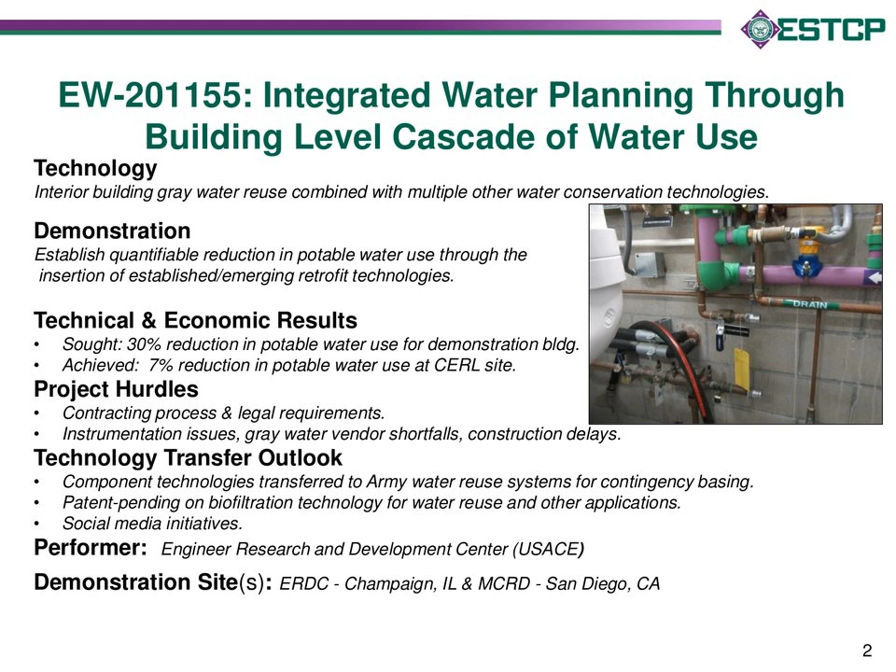Okay, next slide please. So our entire project team, it was a purple project, a DoD project.

We have a Navy partner, Gary Anguano, who's online, and he accompanied us on some site visits. We also had an Air Force partner involved in this. And then we had our 2 sites. Initially we started out with Fort Irwin, California as one of our demonstration sites, but what happened there was we had a change of command and they were no longer interested in hosting.

So we ended up demonstrating at our local site, which is the CERL site, where you see the University of Illinois listed - we happen to be tenants of the University of Illinois here at CERL, and so we worked with them. They are the owners and operators of the building. Our second site was out at the Marine Corps Recruit Depot in San Diego, and Richard Hatcher was instrumental in providing data and support for our many trips out there. On the right, I wanted to acknowledge all of the other people that contributed to the project. They didn't start out at the beginning, but they provided a lot of support, stepping in where we needed it as the project went on.

Next slide please. Background - technology description.

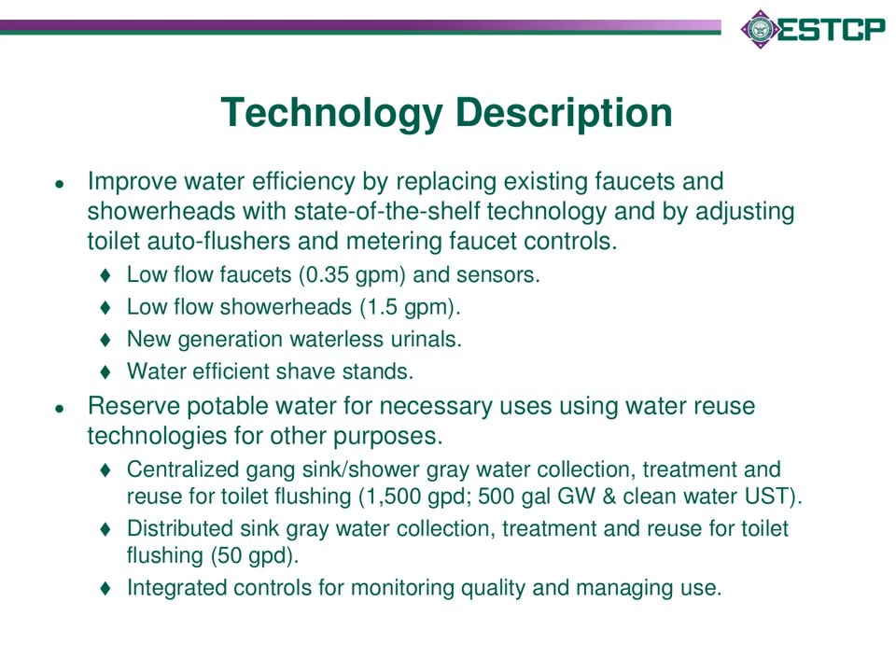So this is an overview of the technologies that we included in the project. It shows the plumbing retrofit technologies that we used, and it also lists the gray water technologies. There were 2 types of gray water technologies we were interested in. One was building scale, a large scale, targeted towards a gang shower, gang latrine that we see in a lot of our training barracks. The second level of gray water was what we call tap to toilet, which is collecting sink water and using it to flush toilets locally within a room within a building.

Okay, next slide please.

So our technical objectives, again, were to retrofit existing buildings. Part of the large expense of reusing gray water is when gray water is taken from a sewage treatment plant and has to be shipped long distances through purple pipe, the infrastructure is quite expensive. So the idea was to do this locally within a building.

But first, to reduce the water use through high efficiency fixtures, and again, to address the two scales of gray water. We have basically the process here to compare the performance of the buildings pre and post retrofit. And as we describe both of the demonstration sites, we'll tell you how they differed in the pre and post assessment.

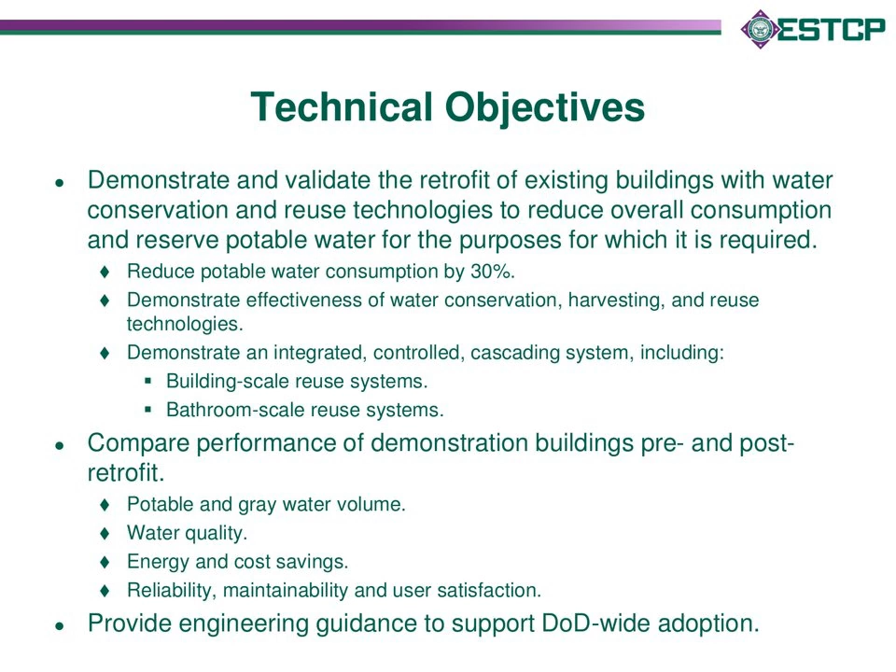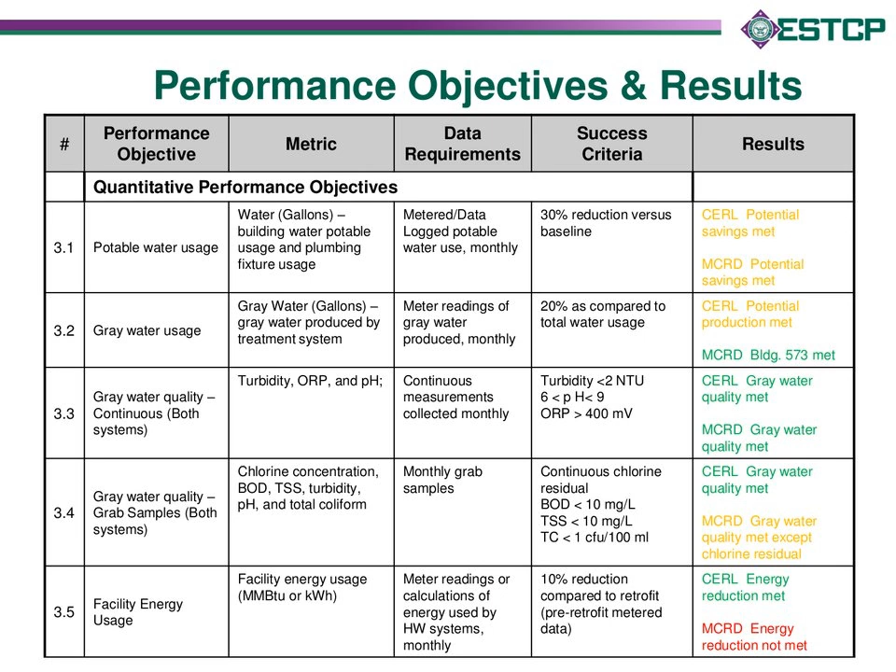So the next set of 3 slides is the detailed listing of the performance objectives and results, and we're going to go into this in more detail later in the presentation. We're just going to ask you to go through this quickly, the next 3 slides.

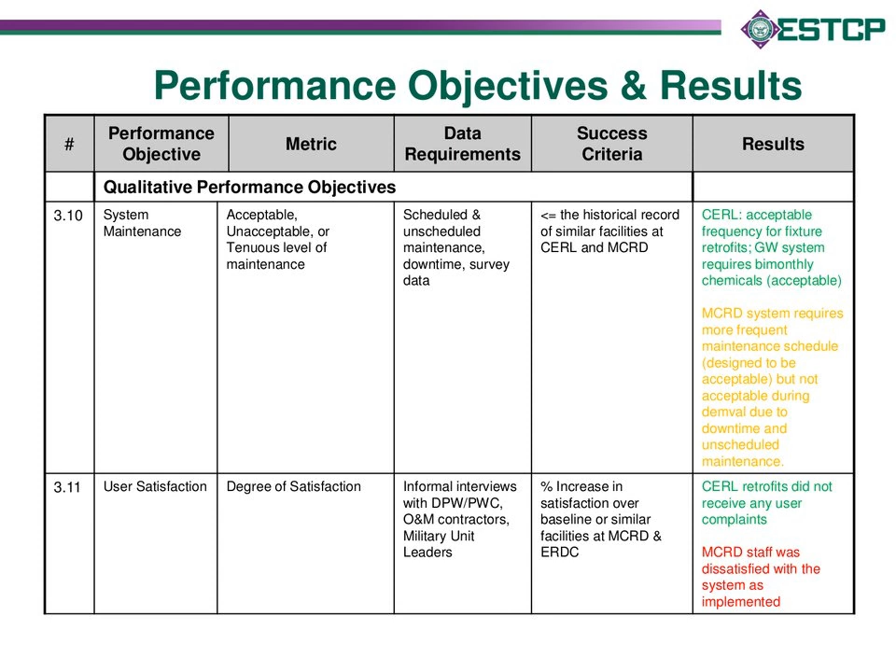Okay, so on then to slide 9, describing our technical approach. Our goal was to reduce overall building water use, building potable water use, that is, by 30% within the building, based on the technologies that we are incorporating in 2 different water regions.

And right here we see the photos of the 2 regions. We have the very arid, dry southwest region, and then we have the not so arid and dry Midwest region. And so there are different drivers for water conservation in both of these regions.

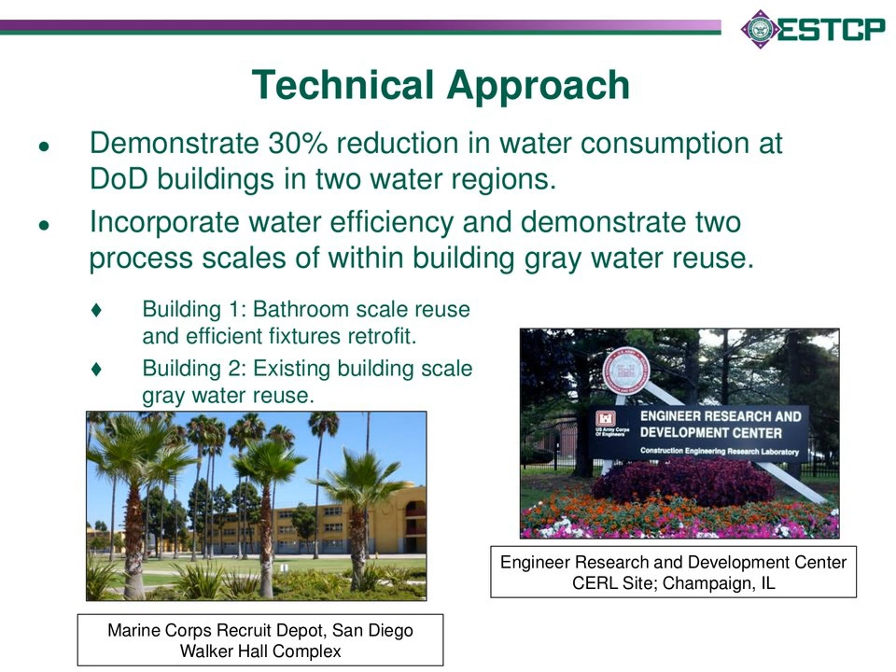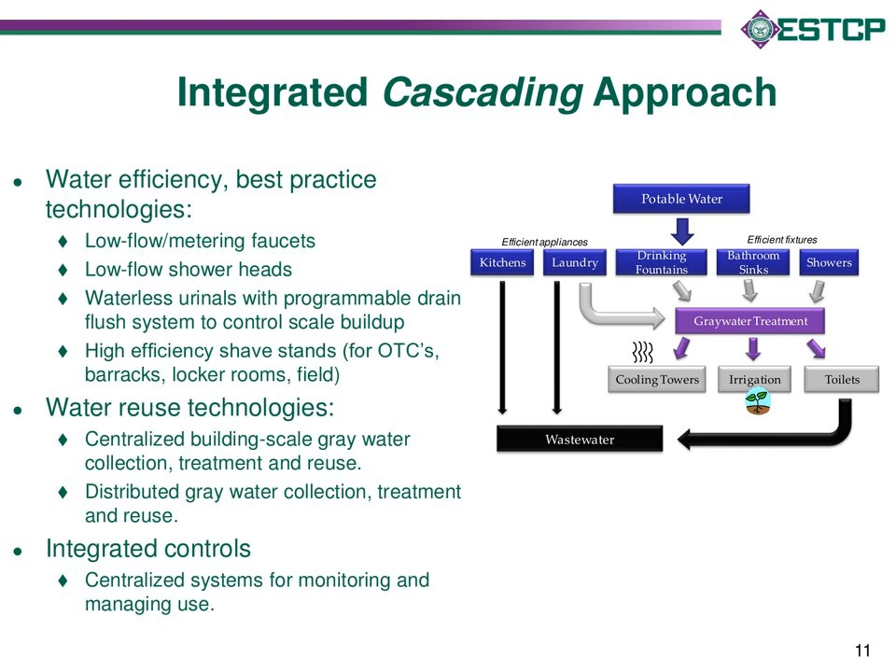And our approach was what we call the cascading approach, and that is using the appropriate source of water for the need, for the end use. Whereas potable water is needed for uses that make contact with humans, and non-potable water is perfectly appropriate for uses such as flushing toilets or flushing urinals. And we also included some control technologies within our demonstrations.

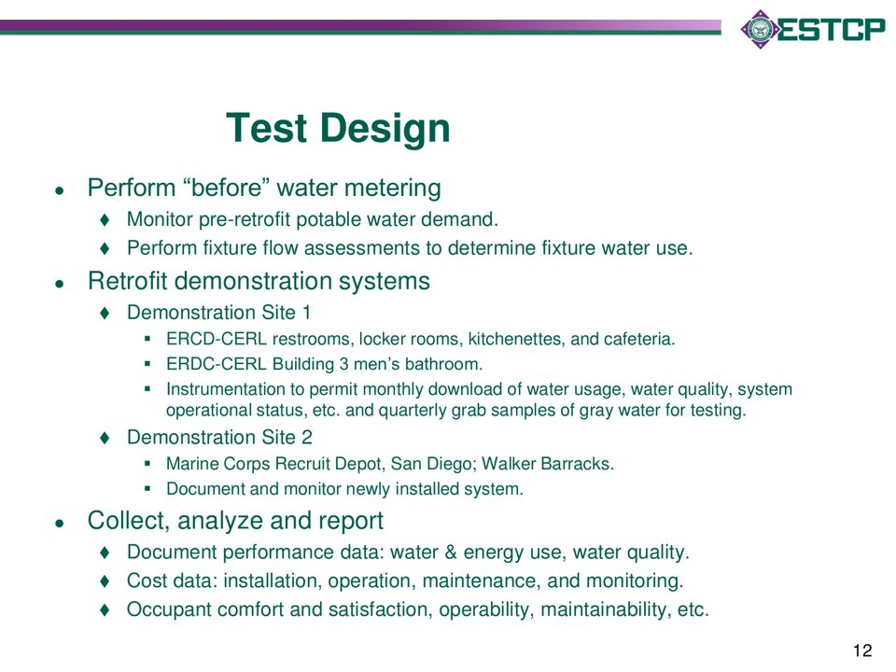So we're on to demonstration site 1. This was our local facility that we work in here at CERL. We isolated this project to the main complex of 3 large buildings to the left of the photo, building 1, 2, and 3. This is where most of the offices are contained and also where some lab facilities are contained.

So we addressed the small-scale, under-sink gray water reuse in these facilities, and we also incorporated the plumbing retrofits here. We included monitoring both site-wide, monitoring building level water use, and then we did some auditing of the fixtures so we could monitor fixture level use. We also monitored the bathroom that contained the under-sink gray water reuse system.

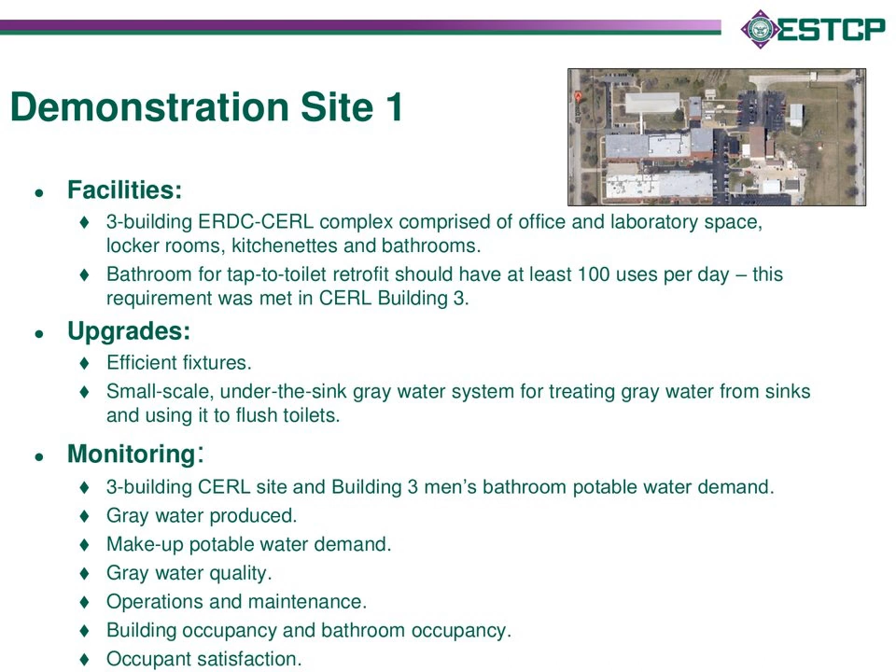So our first technology that was implemented at the CERL site were simply water-efficient fixtures. And we did some auditing, the kind you've seen with the plastic bags and the stopwatch, timing and looking at flows and identifying leaks and conditions. We also identified some other problems like sensor operation on the toilets. We were not replacing toilets as part of this project, but we did get involved in adjusting the sensors and learning how those worked.

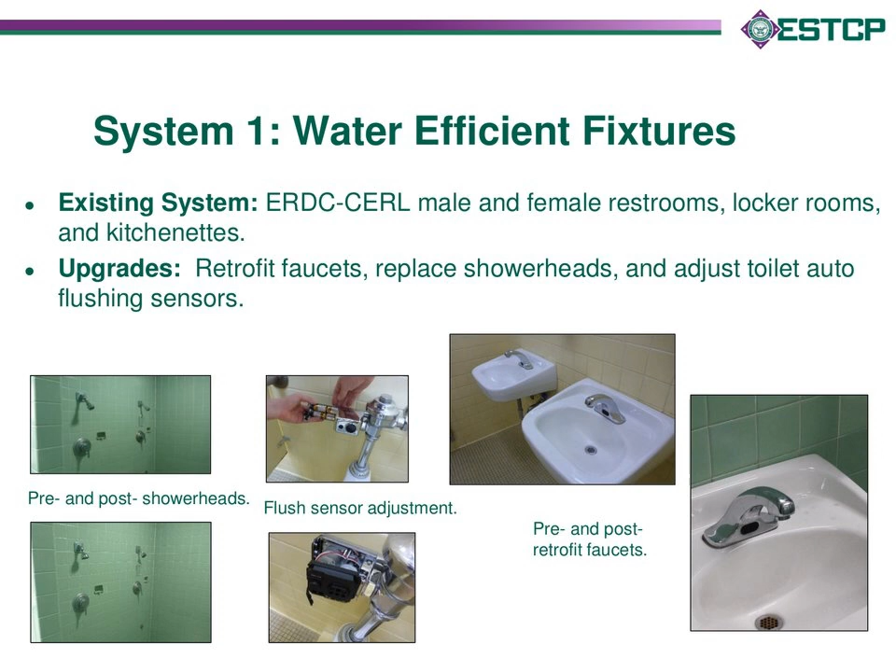So next we should be on slide 14, which is the distributed reuse. I'm going to turn it over to Dr. Page. So we were really excited to try and incorporate a pretty new concept and technology into this demonstration study. That put us on the bleeding edge a little bit, and we'll get into the details as to how this went. But the general concept that we approached the project with was to take a system, at least a concept or framework, that's been marketed and deployed in some cases for residential settings.

Where water is taken, treated directly from the sinks or the sink drains, and then used locally in the same bathroom to flush. So this is kind of an alternative to a building scale centralized system.

It's a very small scale, but the idea was that if we took this approach, we might be able to come up with something that might have lower retrofit costs, and that you don't have to get the whole building plumbing to implement the system. It's something that can be rolled out one bathroom at a time, starting with some of your heavier bathrooms or heavier water use intensity bathrooms. Another idea with this was that we could take these technologies and hopefully kind of target them to high visibility and high water use bathroom areas.

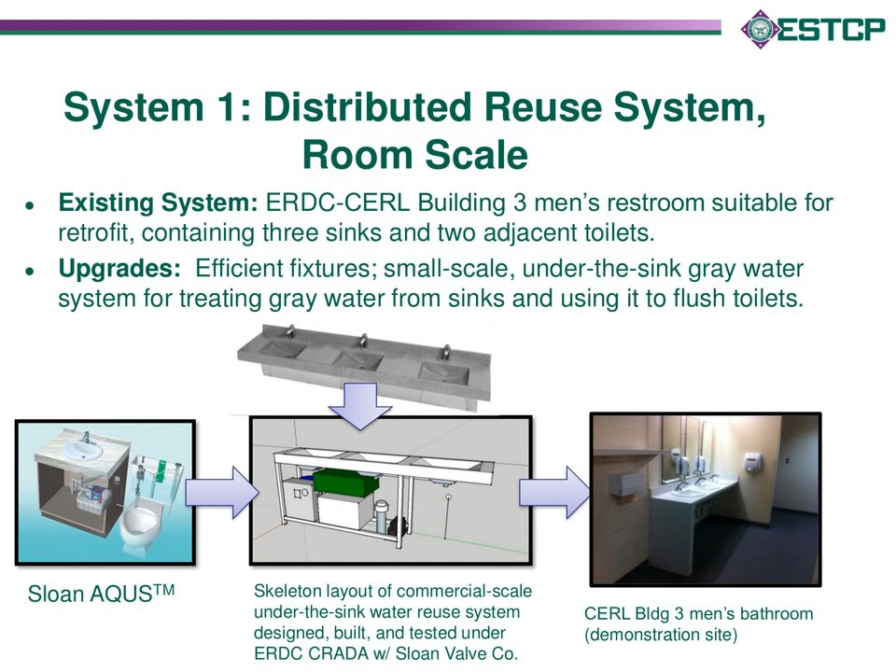This summarizes some of the preliminary work that fed into this demonstration project. At the outset, we worked with Sloan Valve Company to develop some prototypes. We tested two different prototypes, one built by them, one built by us, doing head-to-head testing at the laboratory scale under a CRADA with them, which was leverage funding for this program. Based on that, we down-selected and came up with a final design for the under-sink system to be demonstrated in this study.

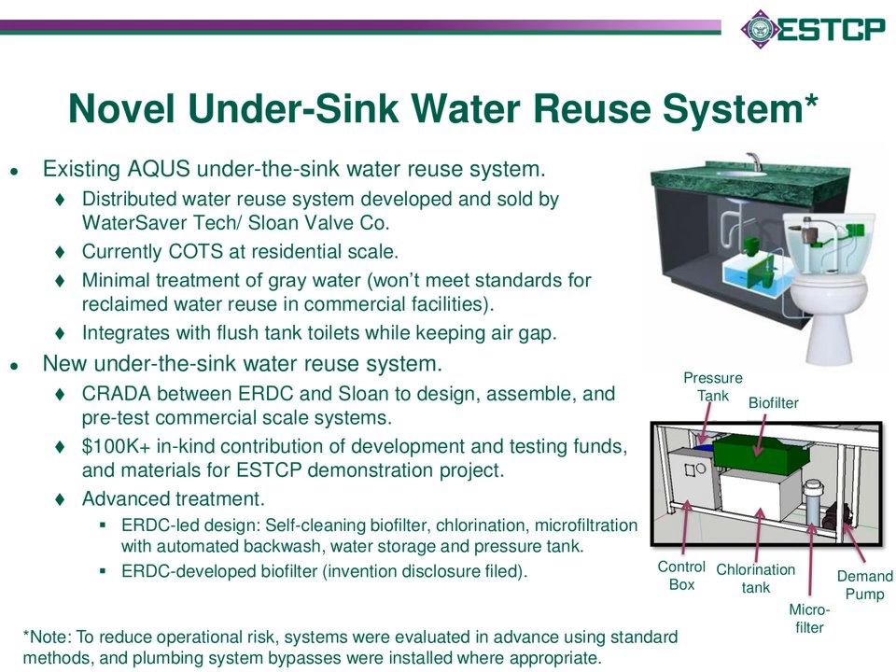We had an upflow biological activated carbon system, and our work in this space led to proprietary developments for gray water treatment specifically. We designed the system to minimize overall complexity while still meeting water quality requirements for commercial settings. One big jump from a residential to a commercial model was having to account for the regulatory requirements in a commercial or publicly used bathroom for gray water reuse, which were quite a bit different and required a lot more treatment, which was a challenge to automate and implement.

In this program we planned two phases of testing: one an offline test within the bathroom with no water reuse demonstrated, but still treating the sink water coming into the system. We originally planned that for a 3-month period and ended up extending it to 5 months. Throughout the tests we observed some needs for improvement and didn't feel comfortable fully integrating this with the sinks and toilets, so we only integrated with the sinks. But we collected a lot of really good data that will help shape a path forward for this system.

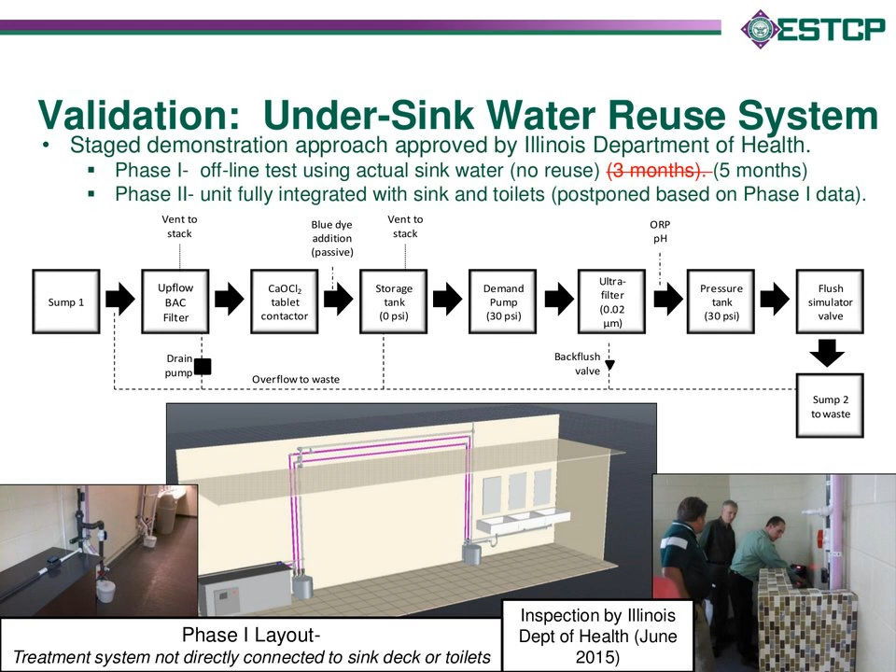Our second demonstration site—I mentioned earlier we had some contracting obstacles. Initially we had planned to install a building-scale gray water reuse system at Fort Irwin. When contracting difficulties made that very challenging, if not impossible, we identified a site that already had building-scale gray water reuse systems in place, and we were allowed to document those instead to fulfill this part of the project.

So what you see here are some interiors of the facility at MCRD San Diego, the Walker Hall complex. This was constructed as an MCA construction project, opened in 2012, designed for LEED Gold, and indeed one of the buildings met Gold and two of the buildings met the Platinum standard. It also had solar panels, but the gray water reuse was an extra add-on that the users wanted. We had three buildings in the complex.

The Smart Clinic, which provides rehab for Marines injured during basic training, the medical barracks where they stay while injured, and a non-medical barracks. These have gang latrines, which lend themselves to a centralized gray water reuse system within a building.

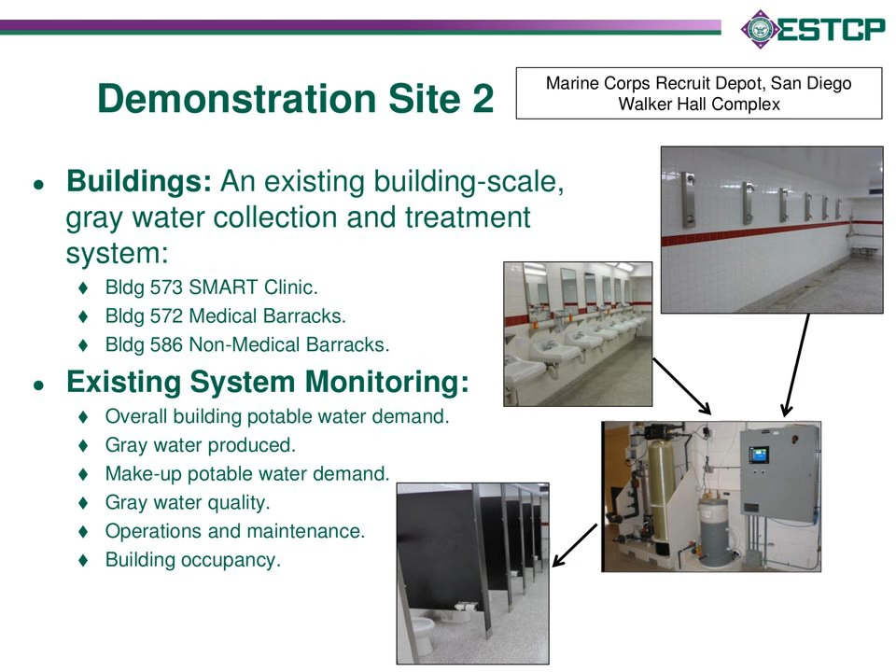You want to talk about this one?

They had two below-ground storage tanks, one for the influent gray water collected from showers or sinks, and they had onboard metering capabilities. We did some extra metering as well with external meters. These systems were installed new with the building, so this was a fairly optimal case in terms of looking at costs, since they were put in with the building itself. This was a really good system to study for this program.

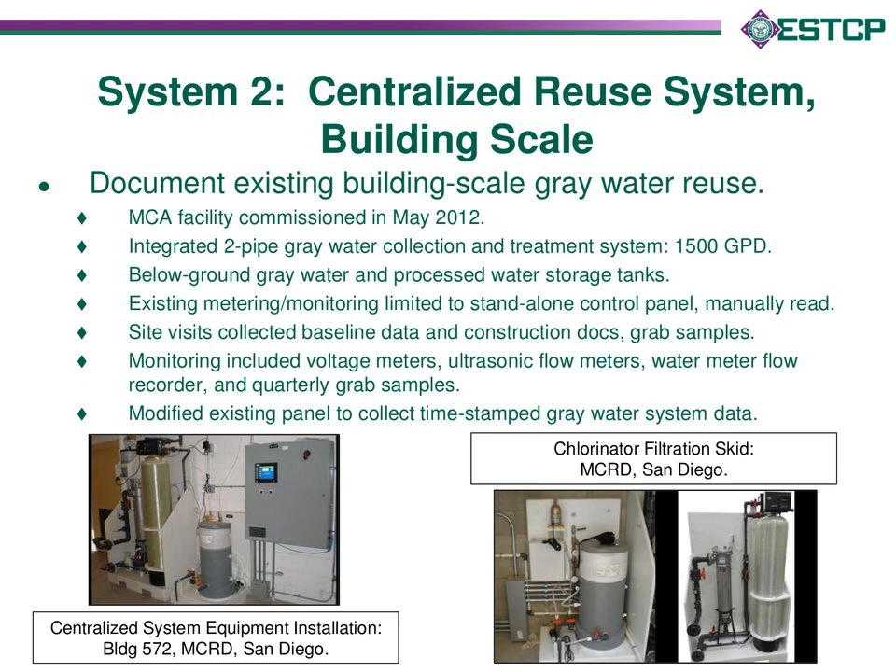For the data collection out at MCRD, or more generally, we were measuring the water-efficient plumbing, looking at the gray water collection and treatment systems for both systems, and also the monitoring and control. We had a series — let's go to the next slide — showing more of the type of equipment we were using to collect data for this project.

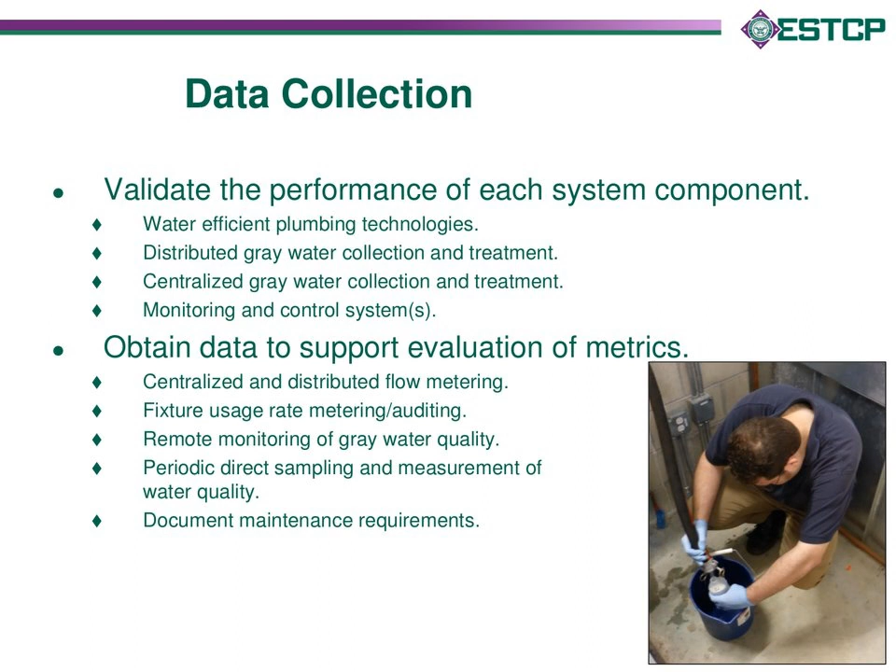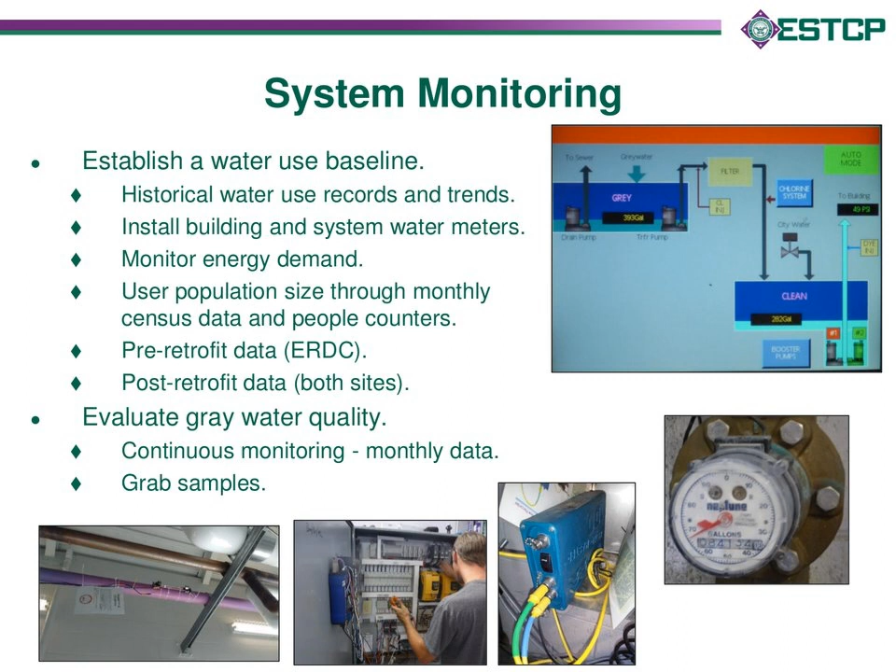Next to that, in the blue-encased box, is a water meter flow recorder. We started out collecting 5-second interval data of water flowing across the meter, which let us get more detailed in our analysis rather than having just one reading a month collected manually. Then, where you see the gentleman standing by the electrical panel, we installed voltage meters to see the electrical demand of the gray water system itself. The next photo on the far left is one of the meters feeding into the panel, which I believe measured produced gray water. We wanted to collect that data over time, not just once a month when local staff was able to collect it. So these are some of the methods we used to collect data.

Now on to the performance objectives — we have a series of slides for each of these objectives. We'll start with the potable water usage.

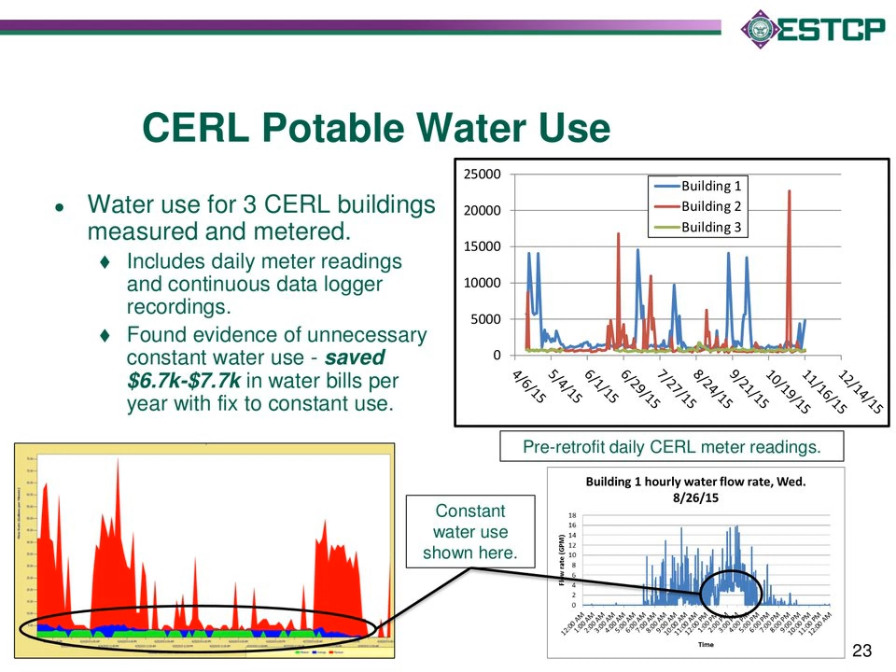One of the buildings has a hydraulic pump, so you see the spikes from that. Another building had a scanning electron microscope. What we thought was interesting, and is pointed out in the text, is we discovered through the data that the scanning electron microscope, which has once-through cooling, was running continuously — it wasn't being turned off because the cooling has to run for 15 minutes after a user is finished. We identified that as a side benefit of metering for the purpose of our project.

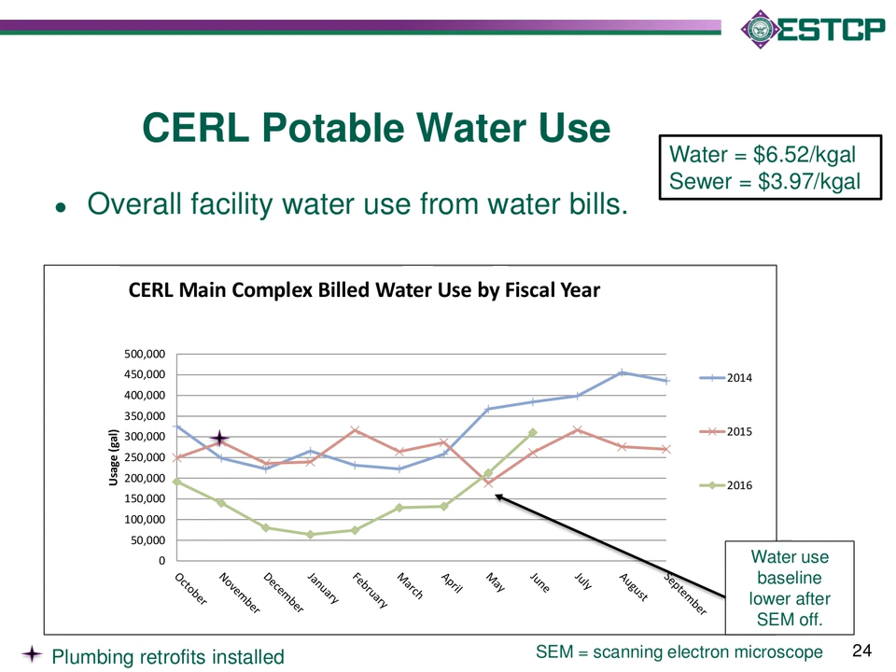And so I would like us to be able to claim credit for all this, but I don't think we really can.

I have some charts on this, but the way we determined our water efficiency savings was from the audit method. The meters we installed - this is the nature we found from a lot of the metering work we've been doing - is buildings that don't use a lot of water. We're primarily toilets, sinks and showers here where we have locker rooms, but we have very large 3- and 4-inch pipes supplying essentially a building with a couple of bathrooms, and the meters are just not that fine resolution. So we believe we were missing a bit of the water consumption through that meter because of the size of the pipe.

Some of the recommendations that came through were to reduce the pipe size and put a smaller meter in, but we weren't really sure that would be accurate if we wouldn't be creating an orifice there by dropping the size. But anyway, I just wanted to make the point there was significant reduction. We don't believe it was all due to the plumbing fixtures, and we did use a model to validate the plumbing fixture reduction.

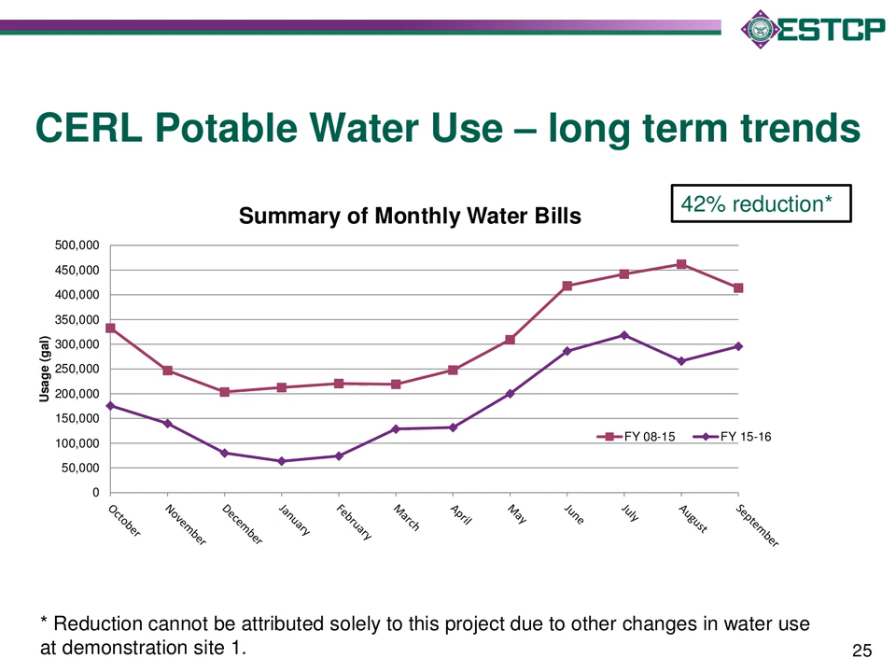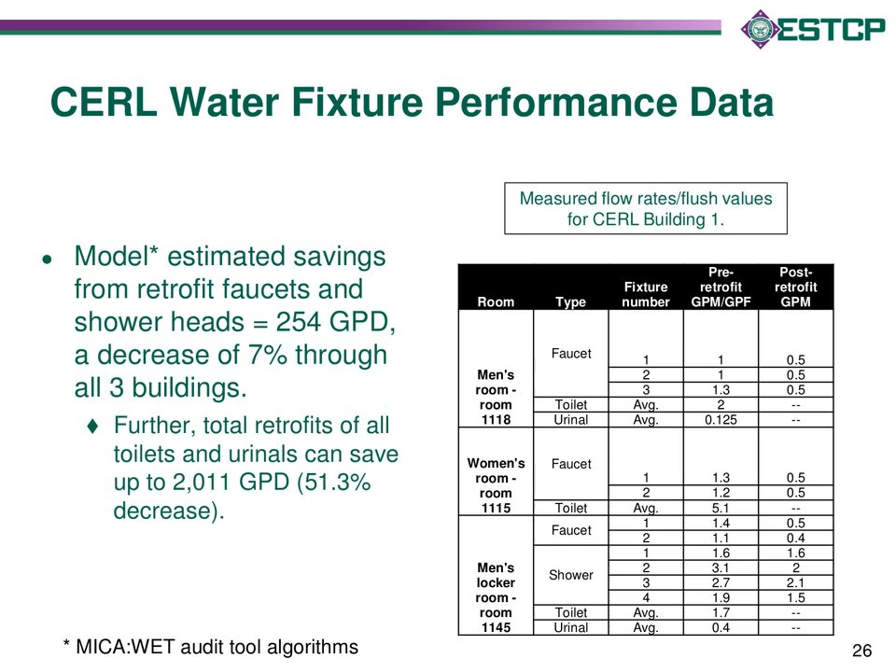So one other technology we were interested in looking at in the context of locker rooms - we've also been picking up chatter from people working in the field that there's a need out there for a more efficient faucet type that can also clean razors. So what happens in the field is that a lot of personnel will take aerators off of the faucet to increase the velocity of water or do various things, but it basically results in a really inefficient approach just to clean their razors.

So we worked with a company, really in a very small capacity, through this project to identify an alternative approach that could be useful in locker room settings, but also could be used in shave stands on the field or, say, in the containerized shower systems in the field as well.

We actually have training areas where we've seen a lot of this, like out at Fort Leonard Wood, where the sinks have been dismantled a little bit and the flow coming out is 2 to 3 gallons per minute, which not only is a waste of water, but also takes away from the water pressure in the showers, et cetera. So we were looking at a system that has a mechanical auto shut-off mechanism, so it doesn't require batteries. When we were doing market research on this, plumbers and other folks said that battery maintenance on the IR systems can be a bit of a pain.

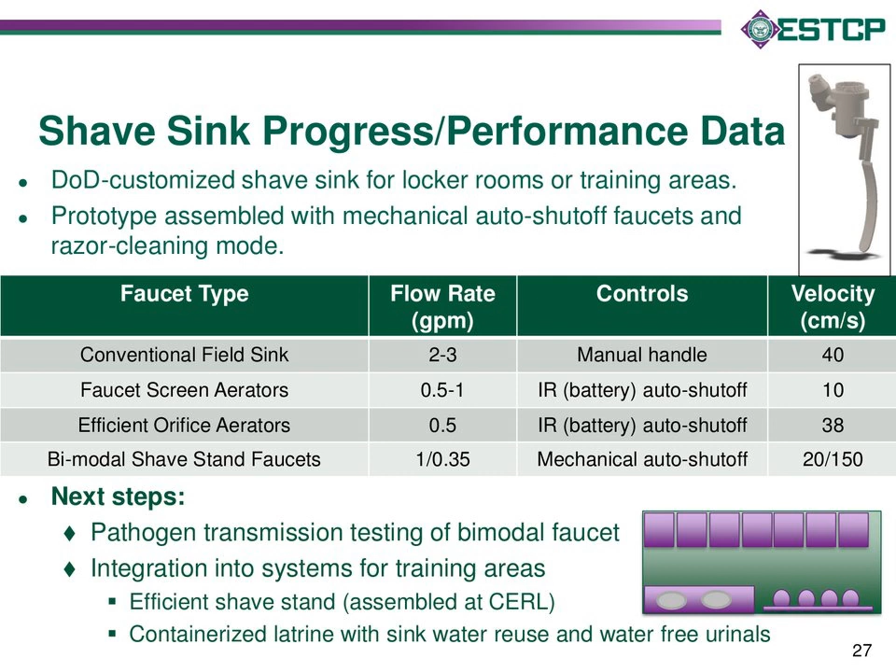And then we had the company build us some custom prototypes, which we did some further work on to improve their functionality and get enough data to do some testing. So we think there's promise here. We didn't install it in a building, but we did some testing out on our experimental forward operating base here at CERL in Champaign, with the end goal of this moving out to CBITEC after we do some more testing.

So the reason we documented the potable water for the other two buildings as well is to look at the theoretical possibility: if these gray water systems were operational, what would the cost benefit and payback be? Clearly the medical clinic uses the least amount of water — it's some therapeutic uses, soaking tubs and saunas and a therapeutic pool and a couple bathrooms — but the barracks themselves have very large shower rooms and toilets and urinals.

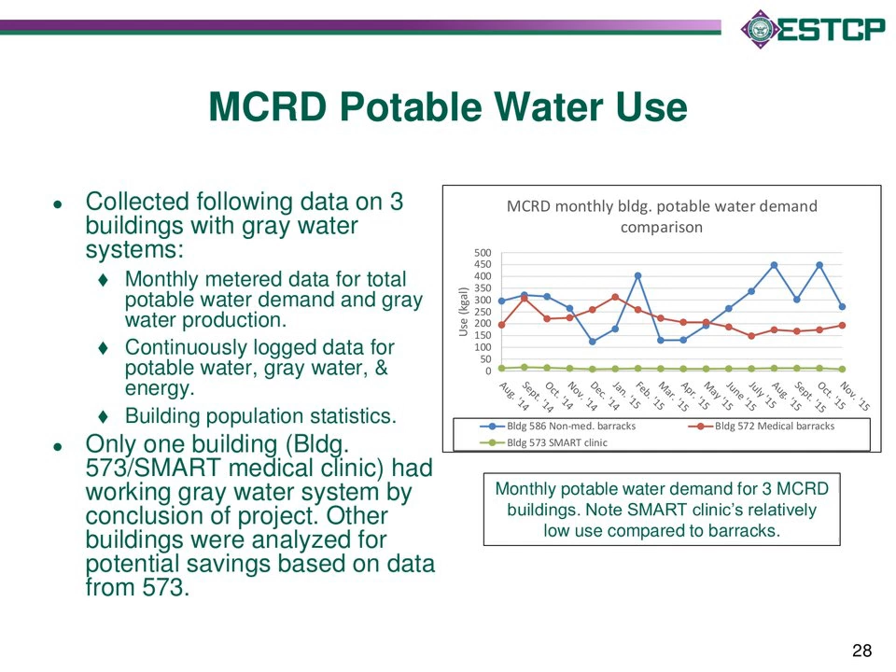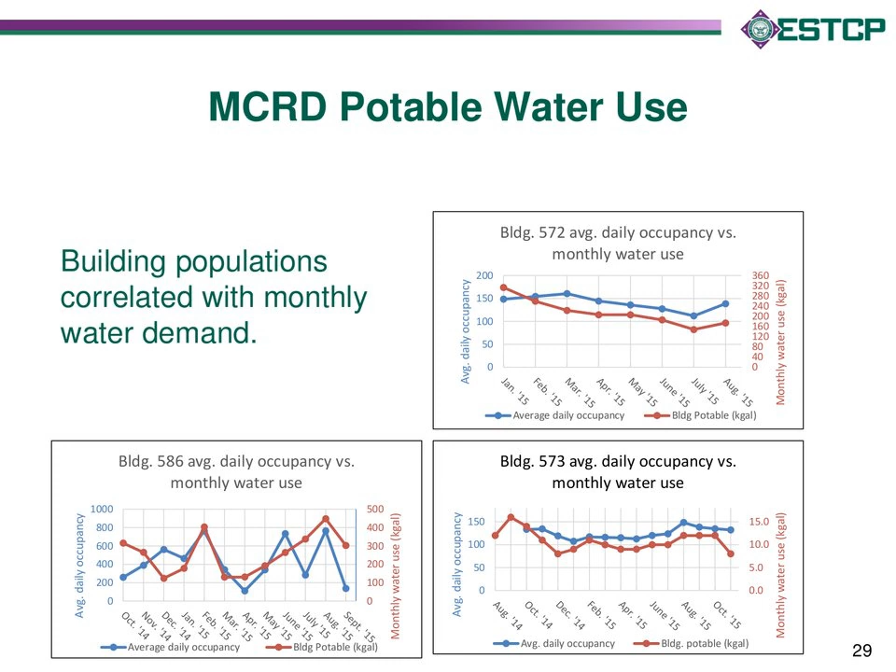So now we're on the gray water data for CERL. For the CERL retrofit, it took place in the Building 3 men's bathroom. We were interested in looking at water use on a per capita basis, both in terms of how much water would be generated from hand washing and how much would be required from toilets. So we had a couple different counters on the doors.

This is as good a time as any to talk about education of the building occupants, because it might be a little daunting to open the bathroom door and see this electronic light flashing at you. We had signs posted outside and inside the door about the people counters explaining what it was for, in addition to signs inside talking about the gray water system, even before it went in, informing occupants that this was coming and who they could contact with questions.

We looked at a number of ways of counting people on installations, and this is a really important topic because we've dealt with this in other locations as well. It's very difficult to get real numbers, and on a military installation you have other factors to deal with: people visiting for training, retirees visiting because they want to go to the PX, family members — do they live on post or off post? So counting people is no minor detail, and a lot of water use, even though we measure it in gallons per square foot, is really driven by people, so it's important to figure out good and accurate ways to count people.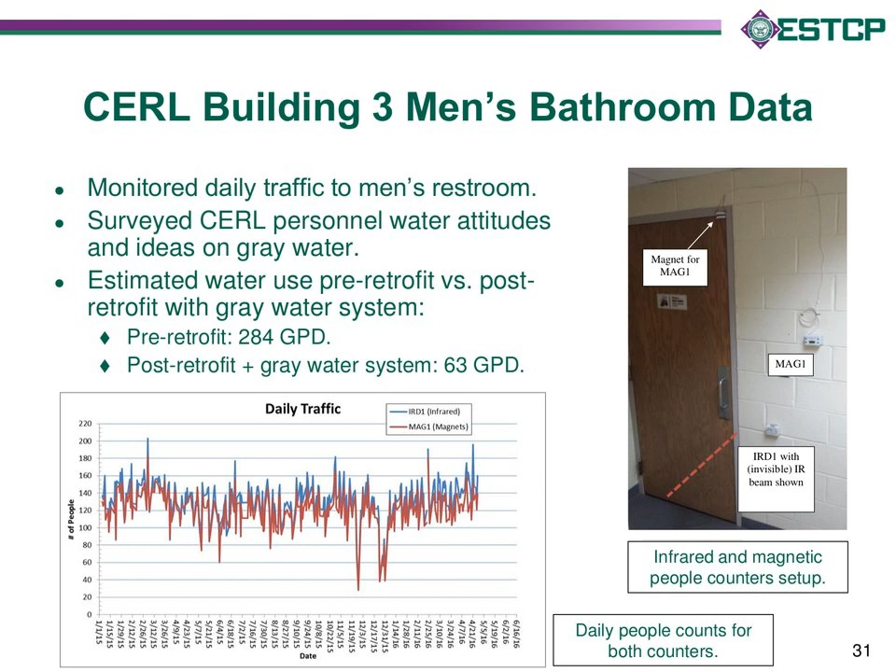So we did collect water data for the gray water system, both from our meters installed out there as well as some of the onboard metering feeding into the control panel. As Elizabeth mentioned, we didn't have baseline data for this site. The systems were all installed in fairly sustainable design buildings. But with water reuse, one of the nice things is you can look at how much water you're reusing, and that gives you a sense of how much you're offsetting your potable demand. So that was the basis we used for analyzing the data.

As Elizabeth mentioned before, there were some issues with meters not fully capturing all of the instantaneous water demand at this site. So we had to use the modeling and look at the data very carefully, and also install some of our own meters to validate some of the data there.

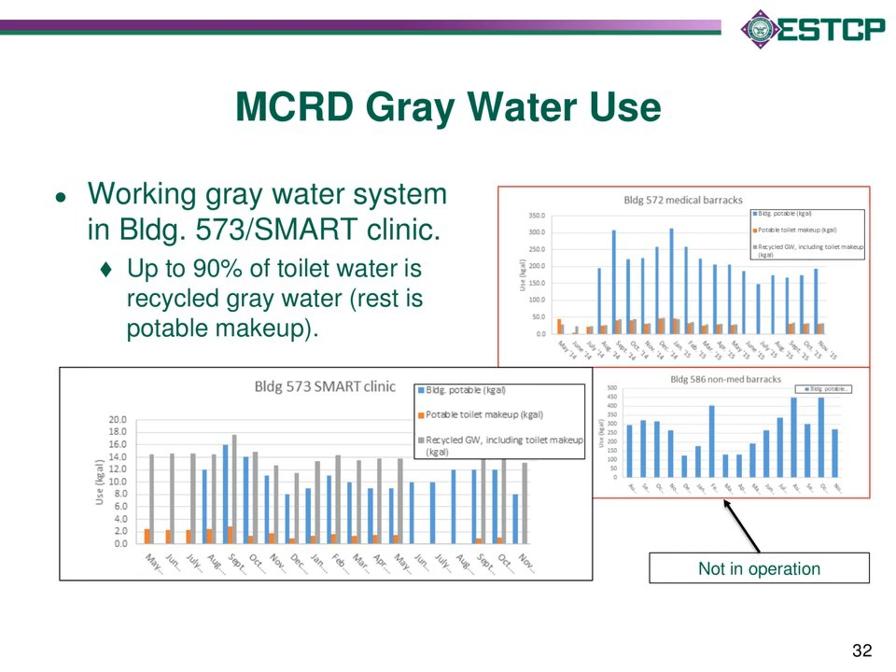So now we'll transition to results for gray water quality.

I'll start going way back to when we were working on the CRADA work with the systems developed in coordination with Sloan Valve Company, where we did pre-testing and pre-validation of these systems under controlled conditions. There's a model we used for pre-validation of gray water systems from the industry that came about early into this project. I think the final version was adopted in 2012, and that's the NSF 350, which is still referenced and used in a lot of guidance documents.

The targets for that are to get your biochemical oxygen demand, or BOD, down less than 10 mg per liter, get your turbidity down low, make sure there's no bacteria in the water, and maintain some chlorine residual. These are standards that apply to commercial or public type settings, which weren't part of the equation for the residential systems, which were more based on having some chlorine in the effluent and not jamming up the valves in your toilet too badly.

So the amount of design we had to put in was quite a bit higher than what was used in the residential model.

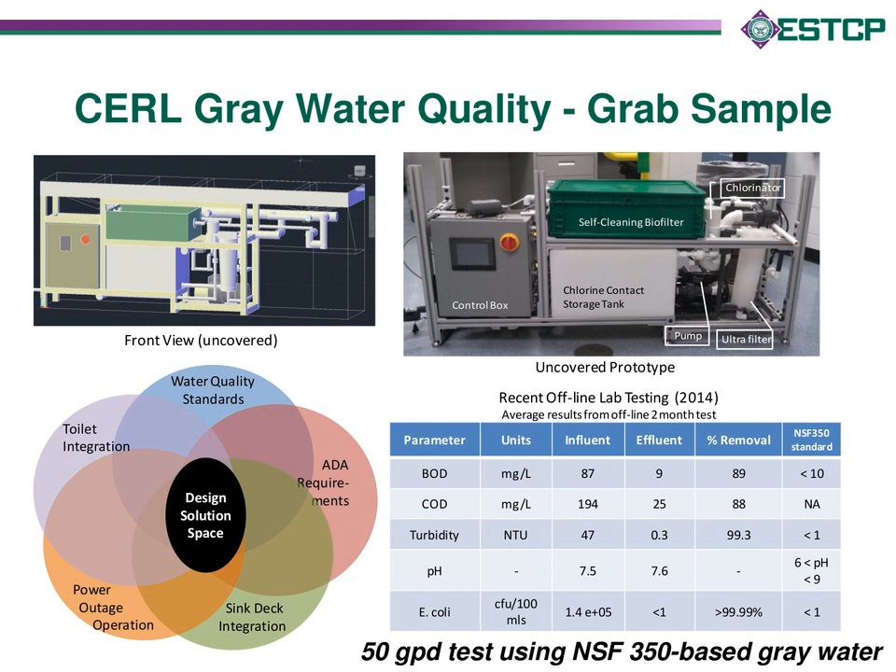So the pre-validation we did, this is data from a 2-month test, and the system seemed to be performing quite well. We did some intermittent loading, but it was relatively continuous compared to what you might see in an actual bathroom where your sinks are firing on and off.

For the phase 1 demonstration, again, this is with the system installed in the bathroom but not hooked up to the toilets to flush those. We were still sending everything to waste at this point, just to collect data under realistic conditions.

We were able to keep the system basically running autonomously for about 5 months. We sampled it very frequently. Andy Herr here helped with a lot of the water quality analysis and sampling, and did a lot of work to really characterize the long-term performance of these systems.

Overall, the automation of the system was pretty good, and that's an absolute requirement for this type of setting where you're not going to have an operator that wants to troubleshoot anything.

We did have some design issues that we're still working on for the next generation of the system. We tested this for 5 months, then pulled it out of the bathroom afterwards. But we did have some issues with some of the internal controls—some of the pump level and demand pump pressure switches were keeping our pumps on longer than planned, which was costing us in energy.

And then chlorine contact and getting the chlorine dose right over that extended period of time under that variable load was also a challenge. One challenge we've seen with these types of systems, both this one and the gray water system at the building scale, is that you've got to have a residual chlorine in your effluent, in the form of free chlorine.

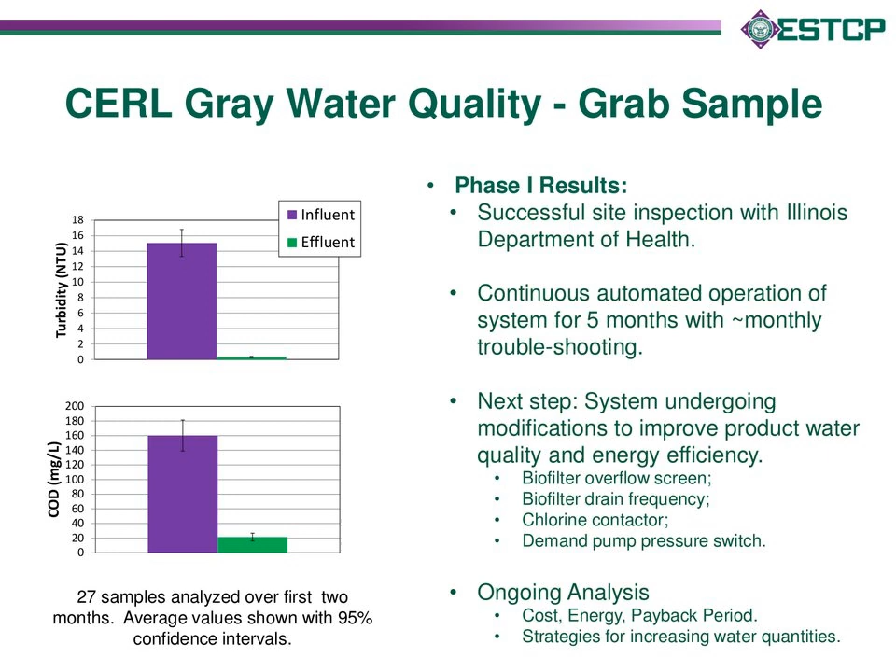So overall, the system works fairly well with regard to water quality. See comparisons of influent and effluent values. For the most part, we did see some minor spikes here and there, sometimes during operational downtimes for the building, like winter holidays. We particularly saw some issues with our biofilter performance, but overall it was working well.

Good question - somebody asked where the ammonia came from. On our site here, there's actually combined chlorine coming into the building. There's some ammonia residual in the hand washing water, and chlorine typically reacts with dirt, but that's one potential source. In the bathroom and shower system, which I'll get into in subsequent slides, ammonia can come from washing and proteins coming off people, but also urination in the showers is always an issue. We see that a lot in the field, more so than here, where in these systems, at least the shower systems we looked at, ammonia was probably less due to urination because there were basically toilets in the same bathrooms.

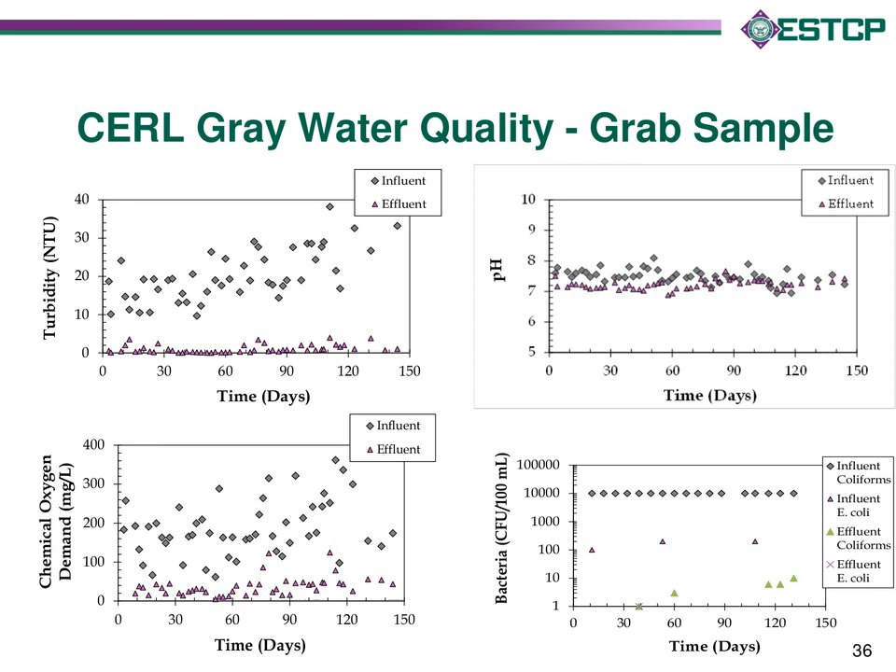But in the field, because the bathrooms and showers are split into separate containers, we see a lot more urination. I'm happy to answer that question anytime - good question.

Okay, so this is some representative data collected from the influent tank and the effluent tank, and we also sampled the toilets themselves to look at the point of use, to see if water quality changed during distribution within the building. Just comparing the influents and effluents, the system appeared to be meeting requirements for water use for toilet flushing in the field.

We did see some issues again with the chlorine residuals - even in the sinks in the buildings, they were sometimes difficult to measure. Because the bacterial counts all looked good in the effluent samples, it seemed like the chlorine was doing what it's supposed to, but maintaining the residual wasn't always helpful. Again, the ammonia issue could be contributing to that through the breakpoint chemistry process. Let's go to the next slide here.

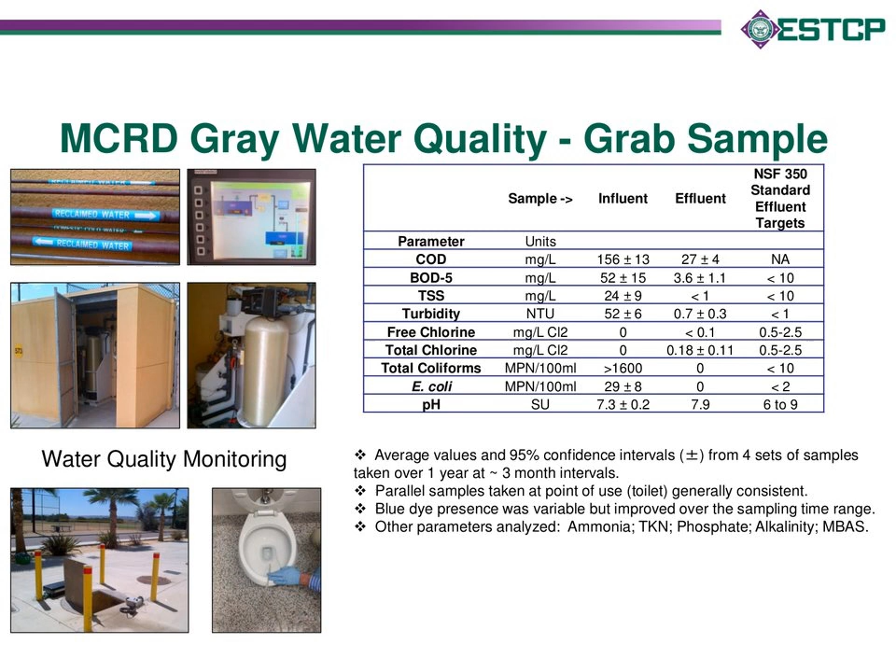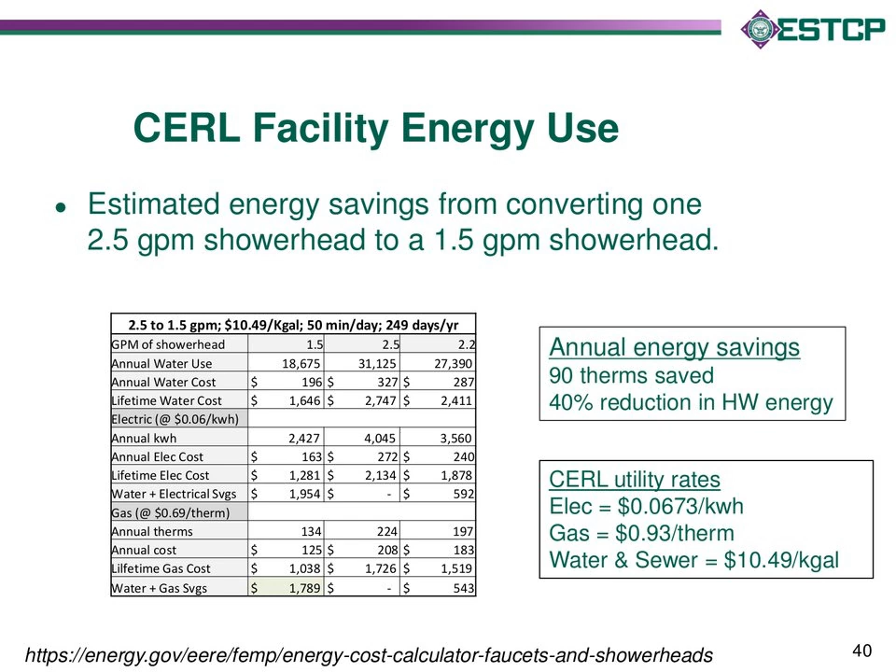We're supposed to give this as a percentage of our water use, or energy use here - about 1% of our site's natural gas use would be saved by these water fixture retrofits here at CERL.

We're looking at these numbers in a little more detail to see what might be driving that energy cost so high. Just as a reference point, when we design systems for field operations where fuel is very important, we target energy consumption less than 20 watt hours per gallon. So the values we were observing are a little bit high, especially for a relatively simple treatment process.

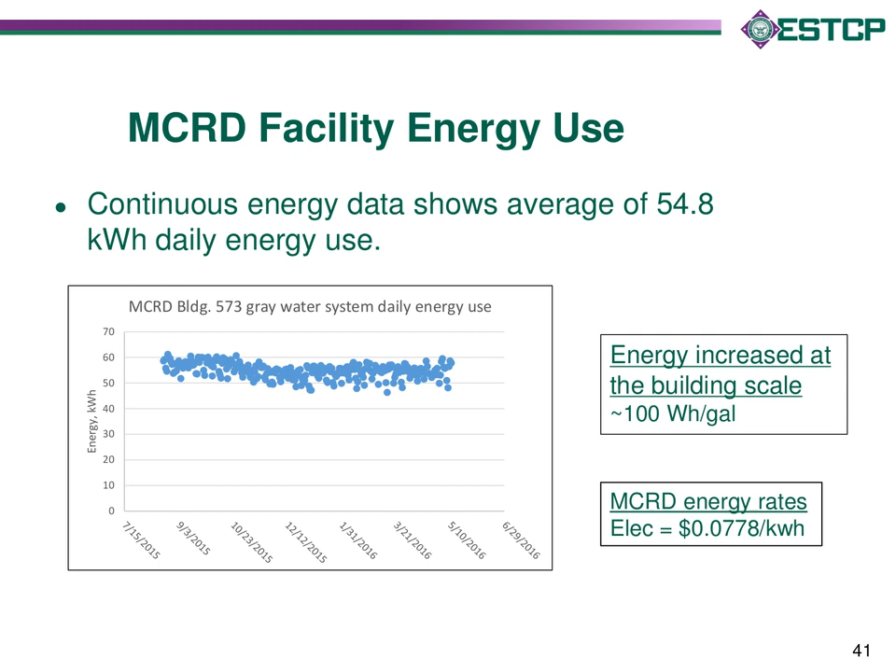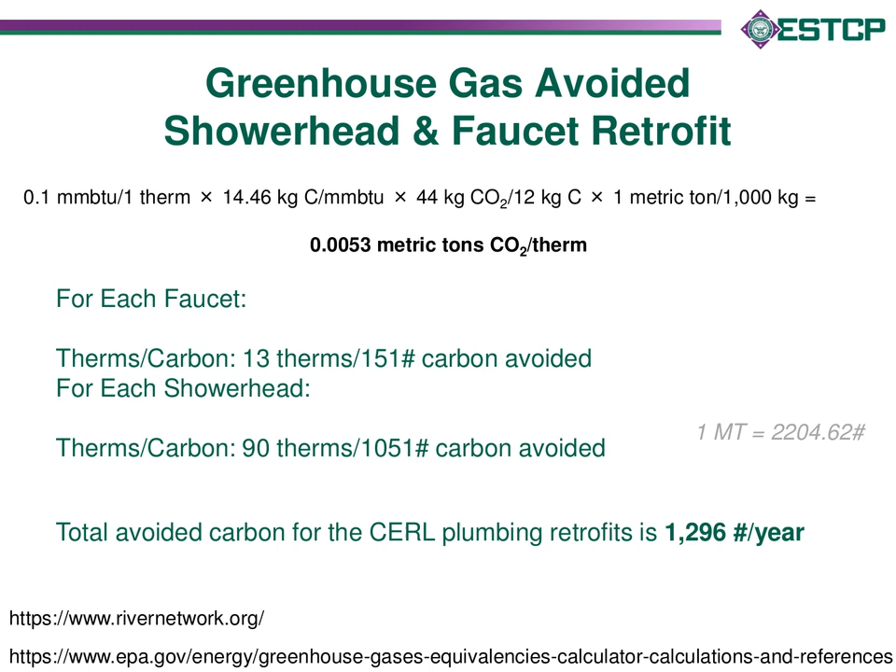Our next performance objective was system integration. The only issue we identified related to system integration had to do with the Building 3 under-sink gray water reuse system. Martin mentioned that if we reduce the flow in the faucets, we produce less gray water that can be treated and used to flush toilets. So in fact, in the Building 3 men's restroom, we did not retrofit the faucet aerators because we needed that water to supply the gray water treatment system. But that was the only issue we observed in this objective.

The next objective is life cycle cost. Starting with the fixtures, particularly when they are saving hot water, they tend to be very cost effective and pay for themselves very quickly. What I did here is three values for CERL. We typically include the sewage cost in with the water cost when looking at life cycle cost savings for plumbing fixture retrofits, but we also include hot water heating if it's an appliance using hot water. So we came up with quite a quick payback when we looked at water and energy costs. We have quite high water costs in this area, but the energy really made this technology pay for itself very quickly.

We also identified additional retrofits that could take place, shown here with the toilets. We had some toilets that used an awful lot of water, some 5 gallon per flush, but it's cold water. So the payback period is really not as quick as it is for the hot water consuming appliances, although we do recommend that the institution pursue those.

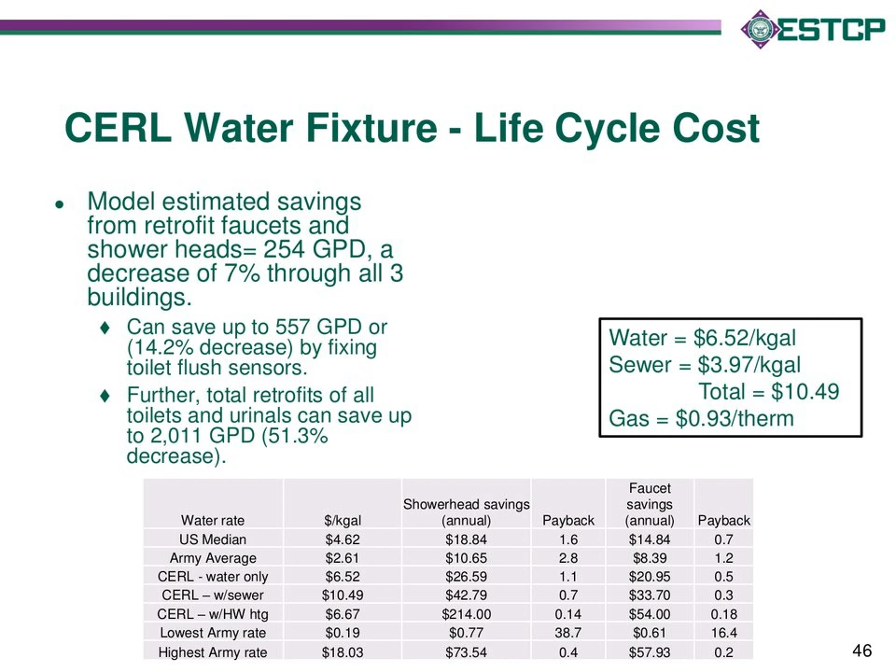For the under-sink gray water system tested on site at CERL in Champaign, this is a system that optimally recovers 45 gallons per day if supplied with 50 gallons per day of water, depending on how many users are in the bathroom. When we did the life cycle cost assessment, assuming 300 use days of the bathroom over a year, and using costs for assembly of the system including labor projections and installation costs - we obviously didn't go all the way to hooking these up to the toilets with the installation. There were some additional requirements when we did the offline test for hooking into sump pumps, et cetera. So we were able to estimate some of the installation costs, and they're really quite high relative to the savings over time.

For water reuse for toilet flushing, we don't have that energy recovery aspect there. There were moderate consumable costs, pretty low maintenance costs, and the system was fairly well automated. But to get under a 10-year payback, which is probably about the lifetime of the system, you're looking at needing your water cost to be around $12.50 per thousand gallons based on this model. If the capital cost of the system can come down by changing some of the components in the system design, that's something we're working on now, and that could be another way to get capital costs down. But during this demonstration, the system did not pay back in under 10 years.

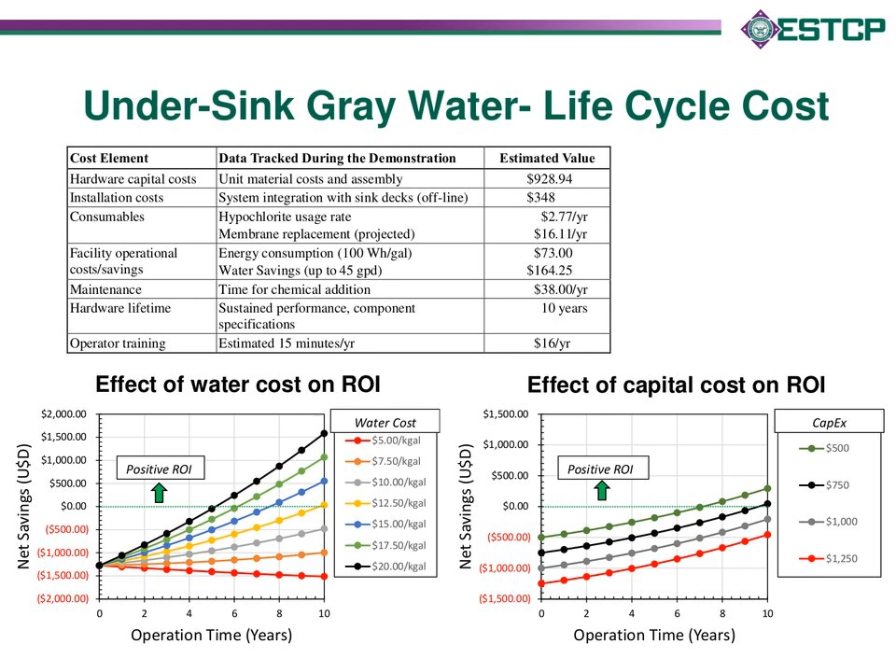So that was one of the key parts of the sensitivity analysis, is how much you can recover, and that really gets at what regulations allow us to do. Certainly in the field, we're designing and implementing systems that allow reuse in showers. I think that's a good direction for buildings to go eventually, to get these systems to be more cost effective.

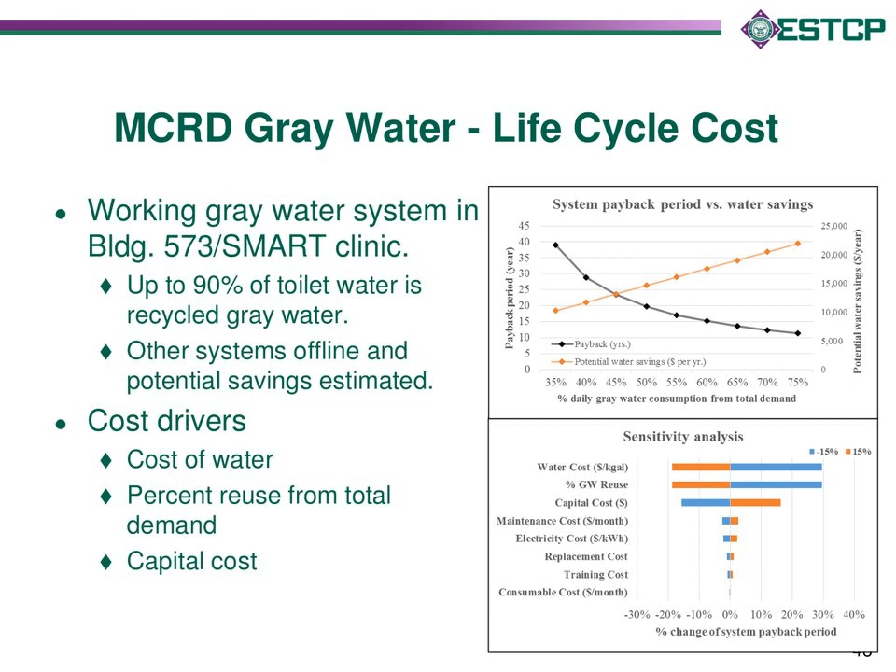Things like energy, even though the energy efficiency on these systems was not optimal in my opinion, it was a relatively low contributor to the payback period. Capital cost, of course, is a key component as well. But some things with capital costs, like installation and retrofit, you're really not going to be able to do too much with that, even with better design.

So the next performance objective is reliability. We had no problems with the conservation technologies demonstrated at CERL. We didn't have any unplanned downtime for the undersink gray water system, but there were problems with the 3 building scale gray water systems at MCRD. And we have quite a number of findings that we're going to talk about in the end, and I think we'll cover all those problems that we found at MCRD.

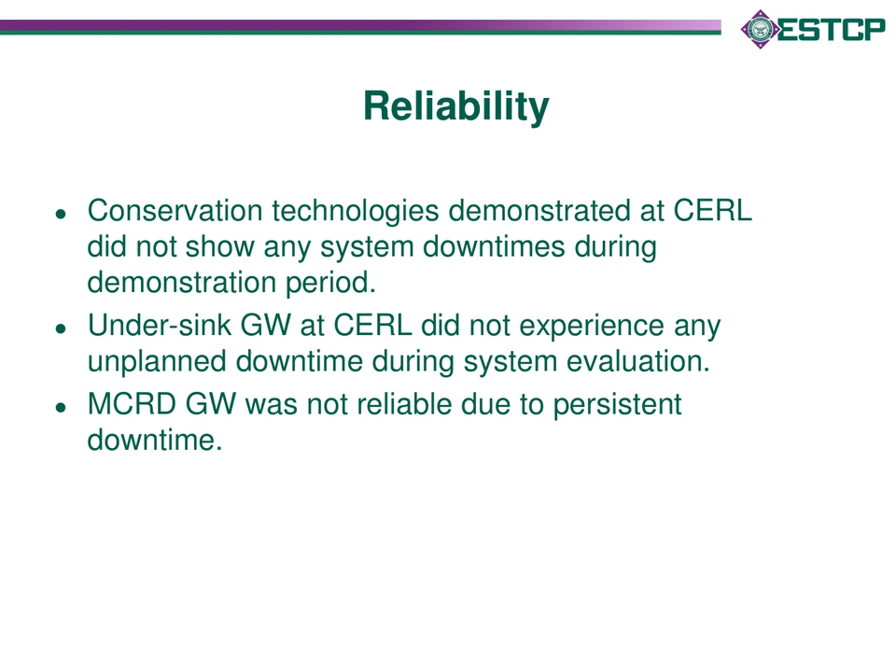Okay, so up to system maintenance. We found no problem, no required maintenance with our fixture retrofits. This is a good time to point out, however, we have problems with toilets, and we did not retrofit toilets. They weren't included as part of the project. We did not replace toilets. Toilets have required maintenance. It's recommended when they have auto flushers that those are adjusted every 2 years, and I rarely, if ever, hear of that happening on military installations, so they typically are not functioning right. So that is something that should be known, even though it wasn't a problem for this retrofit.

So for the gray water systems, particularly at MCRD in San Diego, they tended to be a little bit high maintenance for the level of technical skill and capability of the staff there. They had an HVAC technician monitoring the systems and adding chemicals, but when things went down, they didn't really have any capability to diagnose what was going on or make corrections without a lot of time invested. So the design maintenance interval of 15 minutes per week was not really representative because they had periodic long maintenance times for when the system went down.

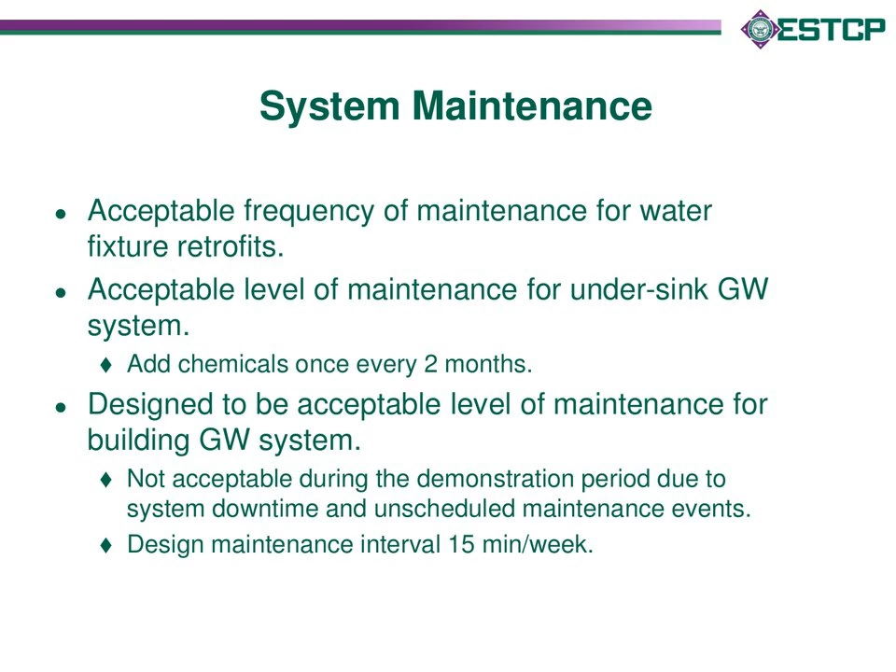Locally here at CERL, we didn't have any complaints. In fact, part of our study was doing a user satisfaction or a user knowledge survey at the beginning, and the details of that are included in the tech report, and they're really interesting. People here, it's a research organization, so they were interested in the concept of gray water. Some of them are interested in it personally. So we found a lot of cooperation, and we did not get any complaints about the plumbing retrofit.

I don't believe we got any complaints either about the retrofit in the Building 3 men's bathroom. Again, some questions about what was going on, but the system was never truly connected up to flush the toilet, so we didn't have that opportunity.

At the MCRD, the people within public works were dissatisfied with the gray water systems, but they were still enthusiastic about the technology. They wanted that technology there. They wanted to be on the leading edge of innovation. They just were dissatisfied by how the systems they owned were performing.

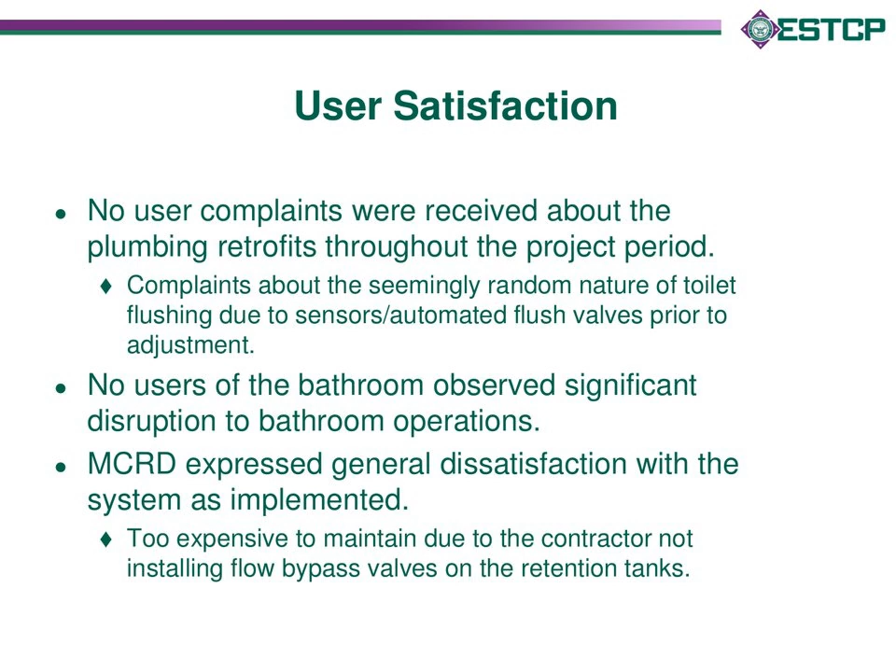So we have, I think, 3 or 4 pages worth of these findings. Some of these issues we've mentioned already. I'm just going to go down the list.

The low flow issue with not capturing the data through the meters. We also had a problem—our building automation system could not read the data from the meters as well, for the same reason. So that's something that should be addressed.

There's a compatibility requirement between a toilet bowl and a flushometer. You can't just take a new flushometer and put it on an old toilet bowl and achieve the design efficiency standards. So that's why we didn't try to do that on our own, and the bowls are the things that are expensive.

The flush valve maintenance I mentioned, operation and maintenance folks have to know to stock the efficient replacement parts. The law requires WaterSense toilets.

It does not require WaterSense efficient retrofit flush valves. With waterless urinals, we originally planned to include installation, but found requirements that made the retrofit cost prohibitive, and that's listed here. The monitoring and adequate instrumentation for purchased systems refers to the Wahaso system in San Diego.

It was very difficult, if not impossible, for us to really understand what that system was doing, because even the installed instrumentation wasn't adequate to tell how much gray water is produced, how much makeup water is produced, or whether they're purging this tank every night. So in some respects we were doing our best estimating on how it was operating.

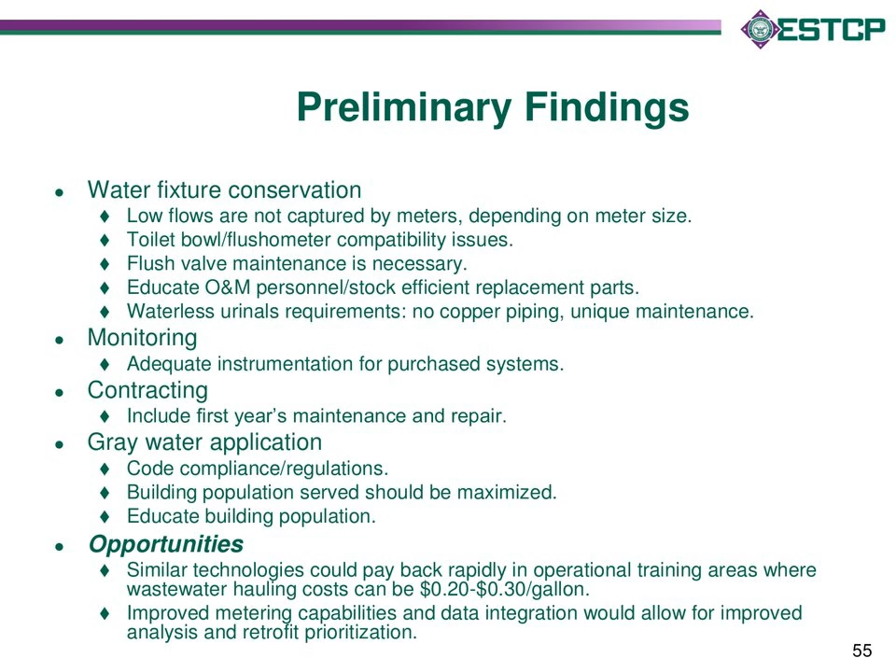I know we're a little over time, but I'd really like to go through these next slides and at least mention the bullets and see if we have any questions on these.

In plumbing, there are regulations and some are contradictory. A lot of people on installations do not even understand what they're supposed to adhere to now, because there are so many different compliance documents out there.

Also, it's important to understand you can get too efficient. There are very ultra-efficient toilets that are not really recommended for large buildings, like large admin buildings with long horizontal runs of piping. So the 0.8 gallon per flush toilet isn't a good idea for us to adopt in the Army. I also mentioned retrofit versus replacement.

O&M of waterless urinals used to be the standard in the Army, and it's no longer, because of some of these obstacles. For automated controls, WaterSense recommends that the auto flush sensors be adjusted every 2 years on toilets. I've never heard of an installation doing that. We found ours were out of whack, and once adjusted, they worked a little better.

There are certainly approval processes—again, bleeding edge—for doing this type of work at the building scale. A lot of times you're not going to have the staffing power to get through the approval process, particularly in states where there may not even be code yet. So that's, I think, a challenge to working on these problems at small scale.

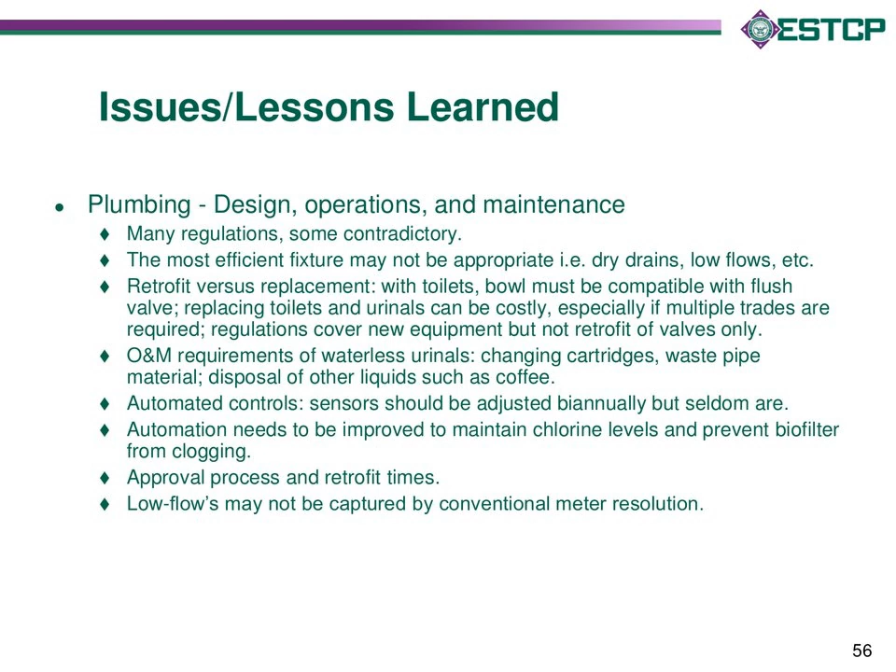Okay, on the next slide, this is all on the gray water. With the MCRD systems, they could have benefited from, say, the NSF 350 guidance that came out probably not too long after those were installed, and from doing pre-validation testing on those systems to make sure they run autonomously without downtime.

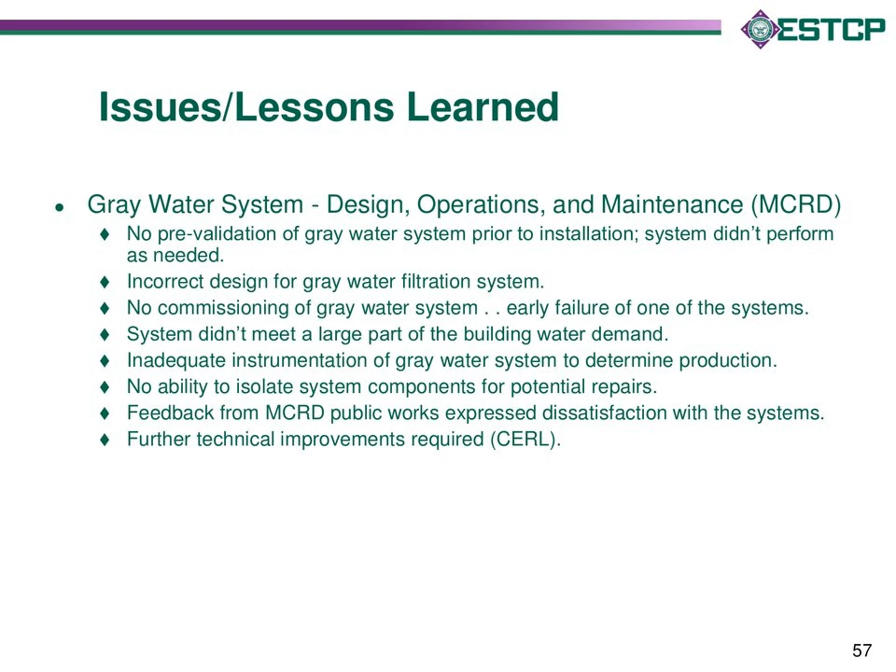Because, as stated, troubleshooting those systems was beyond the capability of staff. There are probably some contracting strategies that could be used too, to make sure sites get the long-term support they need for maintaining those systems and avoiding downtime and the associated frustration. For the smaller scale systems, I think some technical improvements still need to be made to bring down capital costs, and I'll leave it with that.

We talked a little bit about regulations. Most states don't have a water reuse regulation. There is a water reuse Title 22 in California that governs gray water reuse. But NAVFAC, who was responsible for this MCA project, was unable to find a government entity that would help them go through that code compliance process, not the county or the city, so they were on their own. That could have been the root of some of the problems with the gray water systems out there.

As mentioned before, there are things that can be done on the contracting side to improve the support an installation gets with installing some of these more bleeding edge systems.

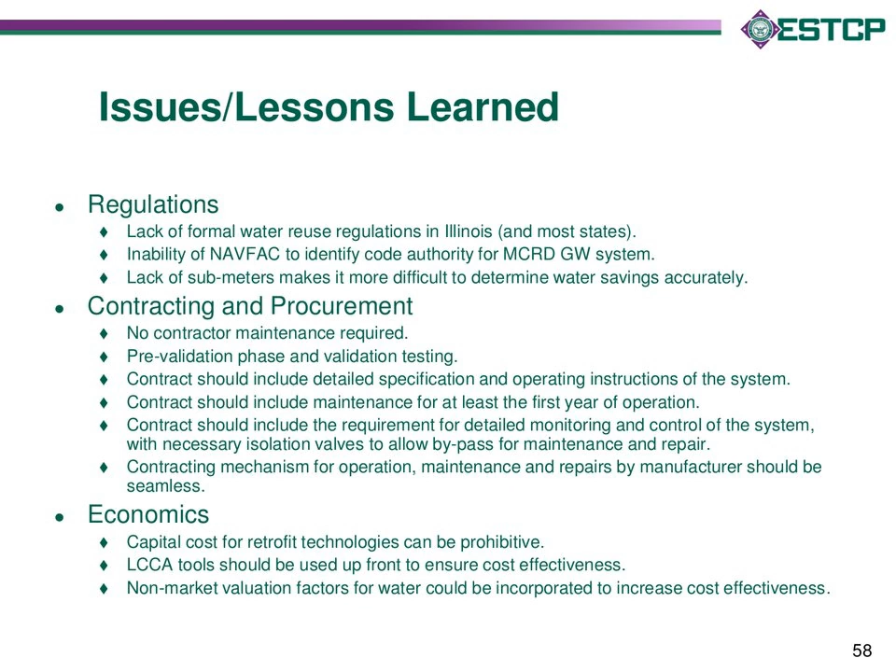Another thing we're really interested in on the economic side, and we've been talking to Mark Kodack at IE&E a lot about this, is with some of the new requirements within the Army for resiliency and energy and water security, thinking about some of the non-market valuation factors and how those might be brought into analyzing the life cycle costs of these systems by incorporating risk factors associated with a variety of potential things that cause downtime and loss of capabilities. Andy Herr here is leading a project along with NOAA to look at non-market valuation factors specifically for water systems and how that could change how we look at these in terms of investment.

That leads into tech transfer, where potential first users are installations that are water stressed, but we see periodic droughts in many areas that never saw drought before. We've had droughts in the southeast that's not usually considered drought prone. So perhaps the reliability of having a local water source, which is reused water, can be worth it.

One criteria we have in the Army, I know DOD does have a policy on water security but I'm not familiar with it, is that the Army has a policy requiring a 14-day backup supply for critical water needs. With non-market valuation techniques employed, perhaps gray water will be seen as a more economical possibility. We're working actively to roll out lessons learned from this project into our work supporting expeditionary or contingency basing type applications.

And again, in training areas as well as at installations, I think that's prime for installing some of these systems and getting them fielded, getting the culture of water sustainability infused into some of our military training. I think that could pay a lot of dividends in terms of speeding these systems up and doing so in a cost-effective manner. So that can impact both the installation community and also expeditionary operations.

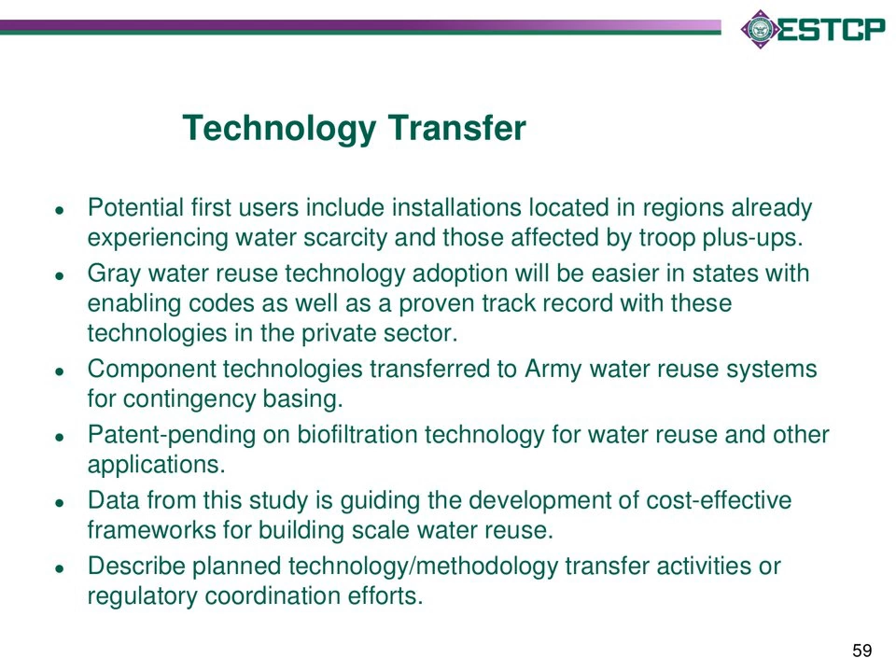So a number of publications throughout the study. We took a look at the UFC. Originally we said we were going to recommend changes to the UFC, but the UFC on plumbing references the UFC on high performance and sustainable buildings, which happens to be revised October 2017, and that has the correct criteria, at least for water conservation, and it does encourage water reuse where cost effective.

We did have a patent filed for the self-cleaning biofiltration system. That was developed, and we're still studying it for a wide range of applications to support military-specific requirements relating to water treatment, including incorporation as a key component in one of our field water recycling systems that we're going to be transferring to PDM, petroleum and water systems.

We are thinking a little bit about the social media content aspects. We have some links that could be shared to support that, but we didn't get too far down that path. Certainly, social marketing of some of these capabilities, showing that things like water reuse can be done in a safe manner, and that those things are happening throughout the country, I think that's always helpful.